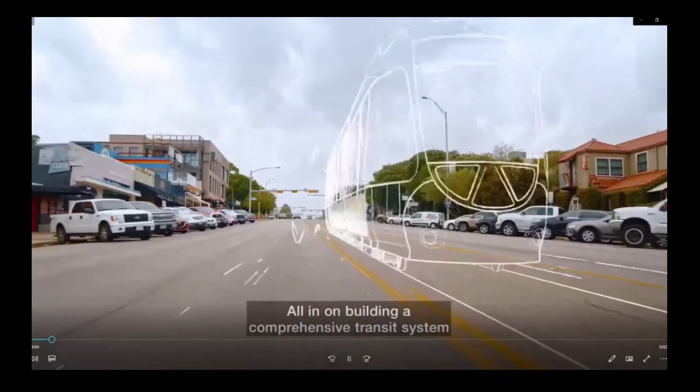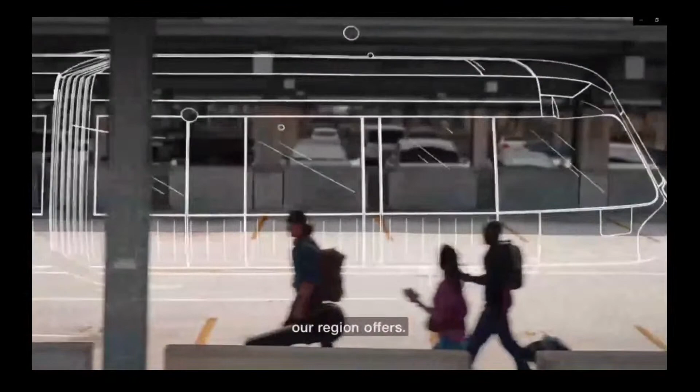Project Connect is all in on building a comprehensive transit system that will transform us into one of the most sustainable, equitable, and innovative metropolitan areas in the country. A place where we can all share in the many opportunities our region offers. All in on transforming us into a more connected region.

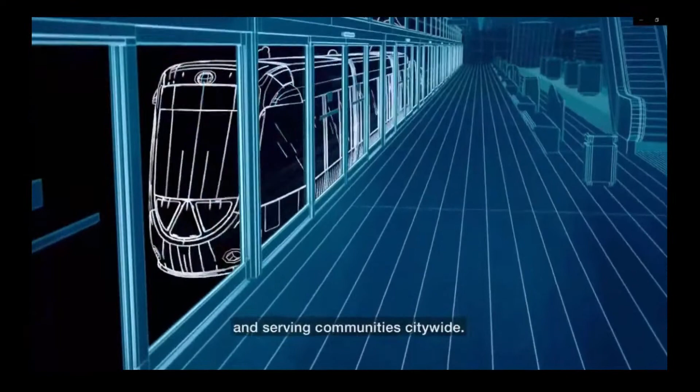With new rail lines stretching across our city, going under busy, bustling streets, and serving communities citywide. Plus, a more accessible bus system to more frequently connect neighborhoods than ever before. But Project Connect is more than just the vans, buses, and trains helping us get around easier. It's built upon our values: opportunity and equity, environment and sustainability, and innovation and technology.

A truly comprehensive transit system can connect people to opportunities. Project Connect will help create thousands of good local jobs and provide more access to healthcare, education, employment, essential services, entertainment, and will also create and maintain more affordable places to live. It's designed to help us all move toward a future without limits.

There's a shared passion in our community for the environment. That's why a commitment to the environment and sustainable practices are core to Project Connect. We envision a zero-emission fleet, and we will lean into the challenge to conserve and protect natural resources in the decisions we make. Technology and innovation inspire much of who we are as a region. Project Connect will embrace that spirit, making transportation smarter, more efficient, enjoyable, and easier to use.

This place belongs to every single one of us, those of us who live here now and those of us who will live here in the future. Project Connect was designed to let us all share in the many things our area has to offer: jobs, education, relationships, entertainment, family. We're all eager to connect on every level. Project Connect is all in for bringing us together in ways we hoped for, dreamed of, needed. Come see how you can be a part of it.

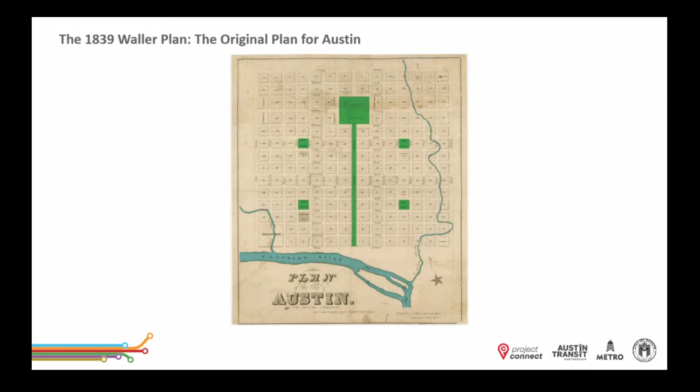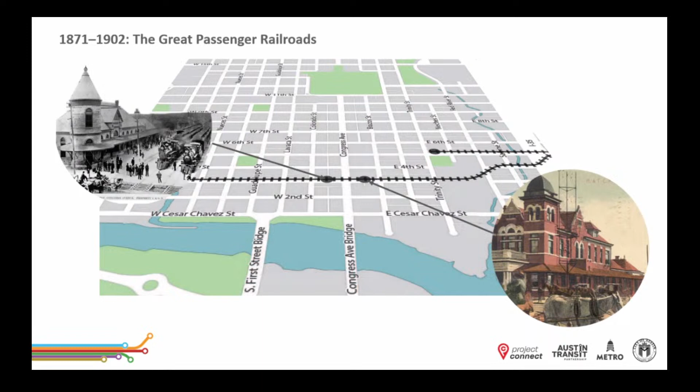One thing we also have to remember is that Austin has a robust history of transit. In fact, transit was an integral part of planning in the early 20th century in Austin. Did you know, for example, that there were 3 intercity passenger rail lines in Austin? They traveled along 3rd, 4th, and 5th streets. There were also 2 great stations located right on Congress Avenue, making it the preeminent transportation center of the region.

Streetcars were also part of Austin in the early 20th century. From 1891 to 1940, a system of 10 streetcar lines branched out to all parts of the growing city from its hub on Congress Avenue.

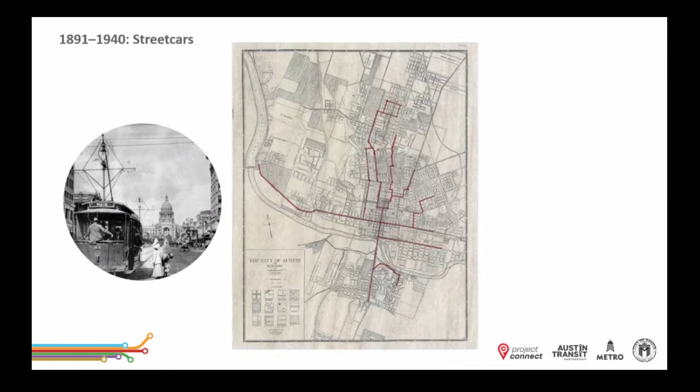We have the opportunity to build upon some of the positive planning decisions we've made in our history, but we must also acknowledge and learn from the mistakes of our past. In 1928, Austin developed a master plan that forcibly moved people of color to East Austin. The repercussions of that infamous plan are still very real. Public transportation has also played a role in perpetuating those inequities.

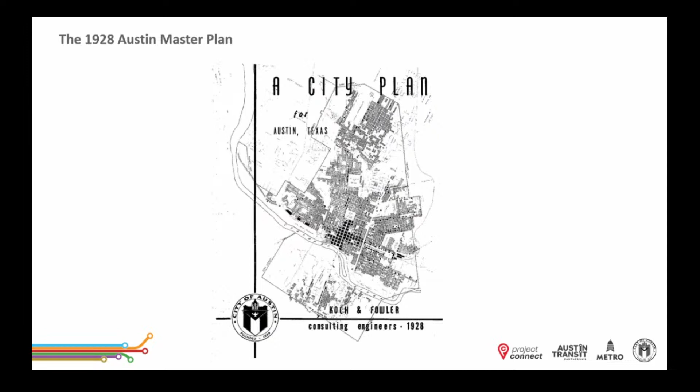But now we have a unique opportunity to leverage public transportation to make lasting change. Project Connect will be an inclusive and transformative program that will help address these long-standing inequities by connecting people to jobs, education, healthcare, and each other. As we work together to build a transit system that will serve all Austinites, we want to learn from the mistakes of the past and create a city that makes people feel welcomed, respected, and comfortable.

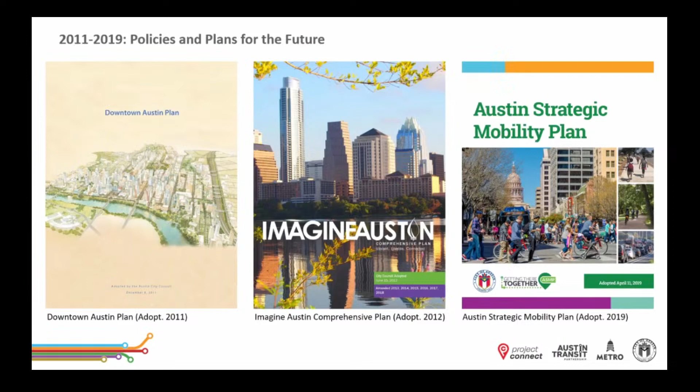Project Connect is a way for us to reimagine transit as inclusive and equitable. The program will add facilities that will be accessible by all. We imagine spaces that feel hospitable, welcoming, and inclusive, a city with a transit system that people can be proud of. And this is an opportunity to reimagine our public spaces.

The program will add transit facilities as well as space for drivers, bicyclists, and pedestrians. The program will also aim to protect existing trees and add more where possible.

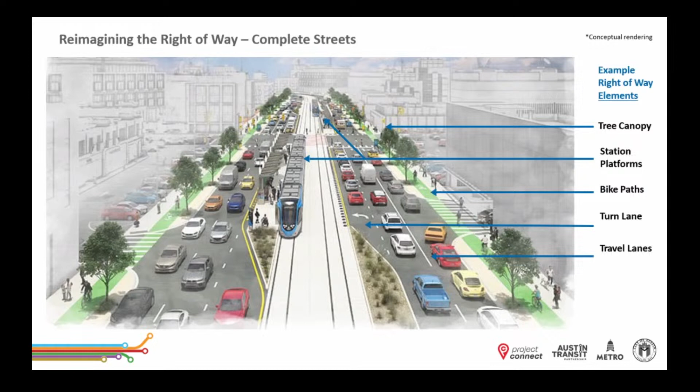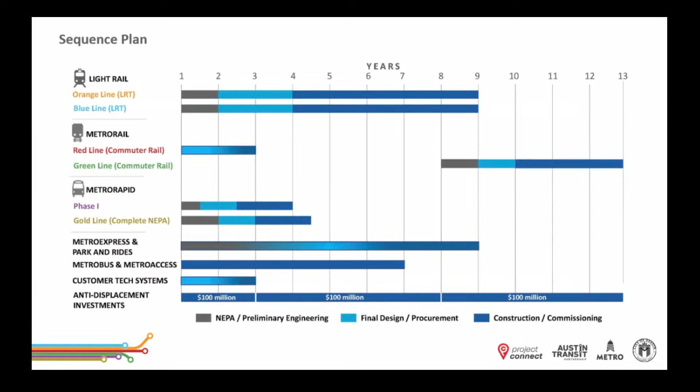Since Proposition A passed in November of 2020, we have reached multiple milestones for the program. There are just too many to name here, but here are some of the highlights.

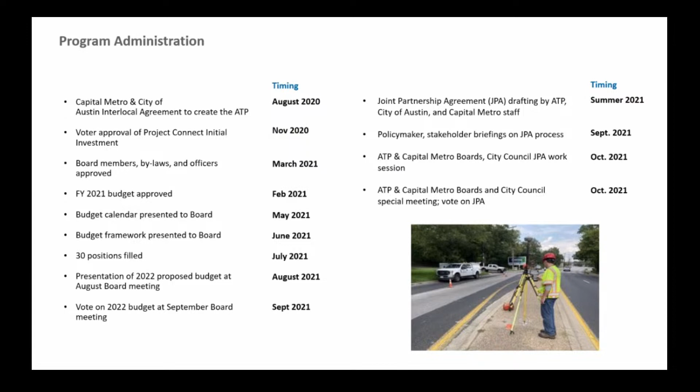We established the Austin Transit Partnership, or ATP, which is a partnership between CapMetro and the City of Austin to implement Project Connect. The team continues to work on planning the new McKalla station, including additional bus infrastructure. Work on the new Broadmoor station has also begun, and improvements are being made to increase capacity and frequency on the red line.

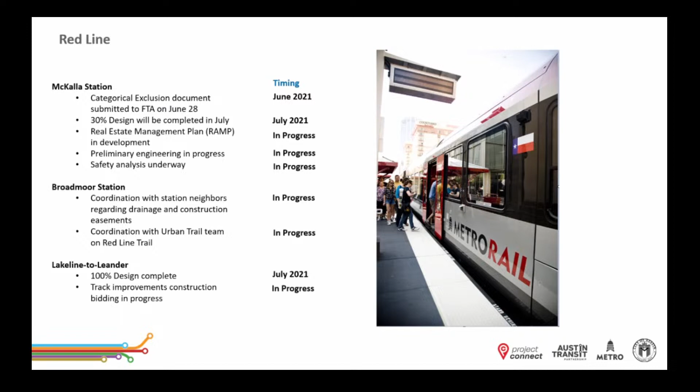Two new Metro Rapid lines, the Expo line and the Pleasant Valley line, were included in President Biden's fiscal year 2022 budget request to Congress. The request proposed a total of $36.1 million combined for the lines.

The team will be back in the community in the fall to get your feedback on the next two Metro Rapid lines to move forward, which are the Burnet to Menchaca and Oak Hill line and the Gold line.

The conceptual engineering, or 15% design, for the Orange and Blue lines is complete, and today we'll be showing you the design plans for both lines. We've met with the community as part of new working groups, and we've had two sets of public meetings to get your feedback on how the Orange and Blue lines can best fit into our community. We're excited to continue that dialogue with you today.

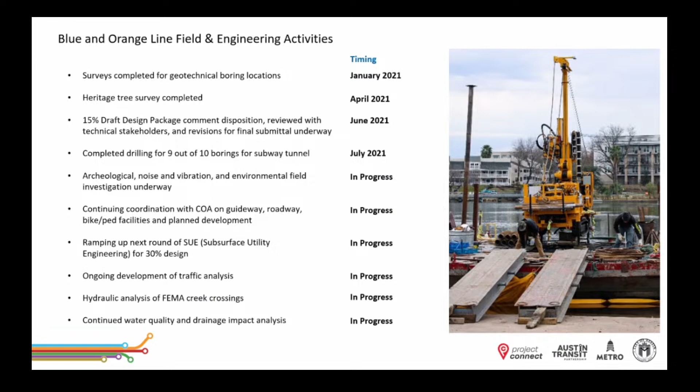Environmental work is also underway. We're continuing to add more pickup zones—that's our neighborhood circulator service. The latest to come online is the new Menchaca service, with the Oak Hill zone to follow later this month.

ATP continues to coordinate with the City of Austin on transit, roadway, and bicycle and pedestrian facilities for both lines. We're also coordinating closely with our other partner agencies.

Today, we're here to talk with you about a program that will help transform our city. The projects in this program do come with trade-offs, though. We'll be retrofitting our city to accommodate new transit opportunities in each section of the corridors, and that's no easy feat. We need your help.

Today's meeting will include breakout sessions to communicate about the project at the neighborhood level. We hope that you'll give us your input and let us know what you think. We're working together to do this right, and right isn't always easy. But remember, we're all in this together.

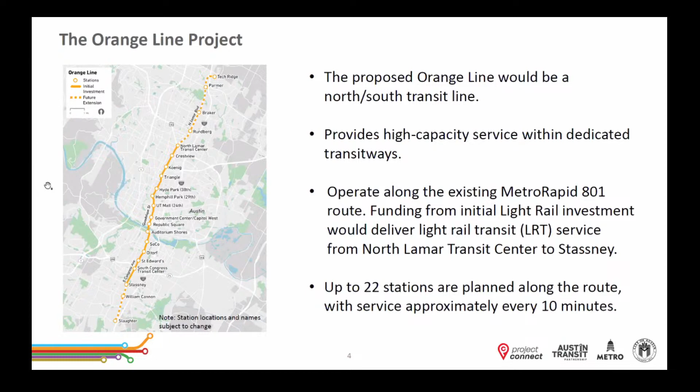Prior to this phase, the orange and blue line locally preferred alternatives were unanimously adopted by Capital Metro's Board of Directors and endorsed by the City Council on June 10th, 2020. In November 2020, City of Austin voters approved an 8.75-cent tax increase to help fund the next phase of implementation for the system plan, which includes both the orange and blue lines, allowing us to enter the phase we are in now, the environmental phase.

Earlier this year, we shared information with the community on the NEPA scoping process for both projects and explained what to expect over the next few years. We're now moving into the next phase of the environmental or NEPA process, which includes development of the draft environmental impact statement. After this phase is complete, we move into final design, then construction, and eventually testing and operation. An important aspect highlighted in this graphic is that public engagement will be conducted throughout this phase and future phases of the project.

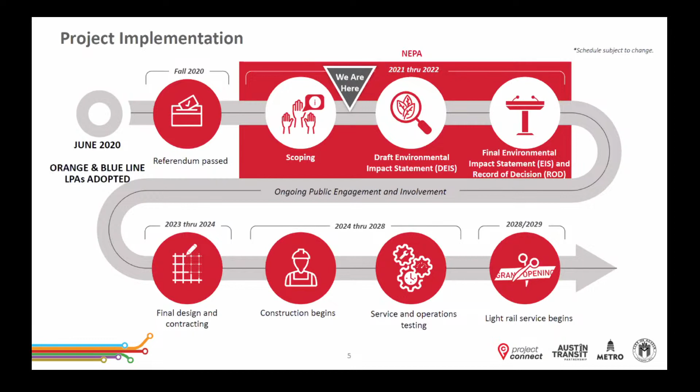For more information on the NEPA process, you can access materials developed for our scoping phase at projectconnect.com. Visit the Get Involved page and scroll to the bottom to look at previous virtual meetings.

There are 4 corridor design milestones that mark our progress on the project. At the same time as the environmental process is underway, the engineering team is working on preliminary design plans for the project. The environmental analysis and the preliminary engineering influence one another as we work towards a final environmental impact statement and the final 30% design plans.

So you can see, based on that graphic, we're in the top part, and we're in the earliest part at the top where it says 15% design. The 30% design will be complete sometime in the spring of 2022.

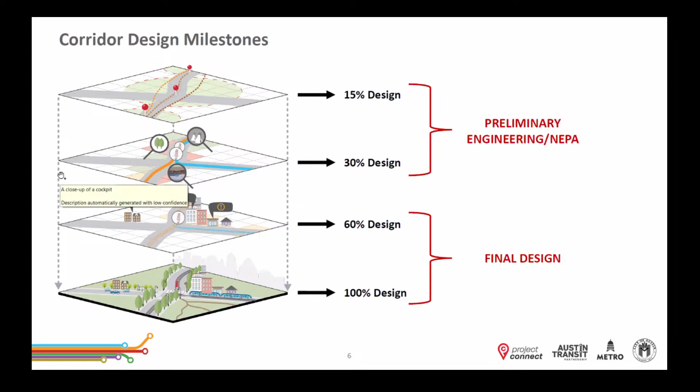A little bit more detail on the 15% design: it includes a lot of elements, initial engineering alignments, the estimated right-of-way, and identification of significant engineering and environmental challenges.

During today's presentation, we're going to share the light rail design elements and criteria that inform the project's design. We'll also discuss the constraints and considerations that have gone into determining options for solving these complex engineering challenges. These considerations, along with the community's input on project design, including station design and amenities, will be used to refine these engineering plans as we progress.

As part of the 15% design process, we'll also analyze traffic impacts and develop initial estimates for things like service frequency and ridership. More information on all of these items, as well as the analysis of potential environmental impacts and any mitigation strategies if necessary, will be shared with you in the months ahead.

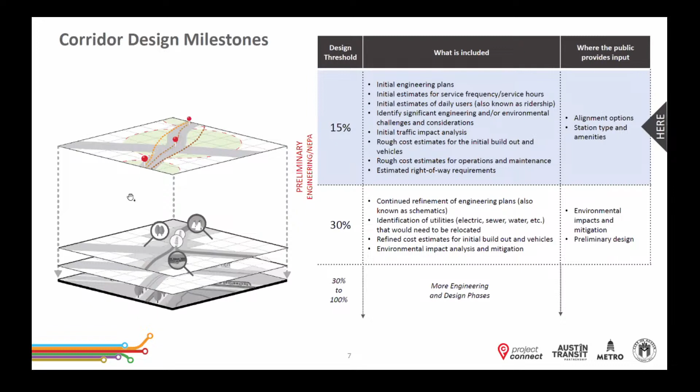To recap some of our recent engineering, environmental, and public engagement efforts: we've conducted right-of-way and utility surveys, coordinated with the City of Austin on planned roadway, bike, and pedestrian facilities and future development projects, and initiated archaeological, environmental, and historic resources field investigations.

We held 2 rounds of public meetings, including the scoping meetings I mentioned, held between January and March, and station alignment meetings held in April and May of this year.

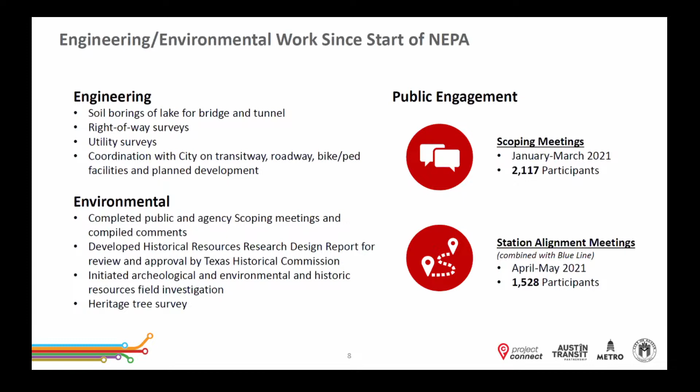This community input really helps us understand your concerns and desires as we continue to design the project. More details about the community engagement and input gathered so far are on the Project Connect website.

So with that, I'm going to pass it on to Kimmy, who's going to go into more detail about the light rail design elements that have informed our 15% design.

Thank you, Jerry. This image on the screen illustrates the common elements of a street right-of-way that incorporates a light rail transitway and station, with other elements such as travel lanes for cars, street trees, bike paths, and sidewalks. Because there is limited space for transportation in the existing right-of-way, we must reimagine the right-of-way and consider the trade-offs for prioritizing the use of the space, then determine if we need to acquire more space while minimizing the impacts.

When we say reimagine the right-of-way, what we mean is that we can work to include safe pedestrian facilities, trees, dedicated space for cyclists, prioritize connections to local bus routes, and identify opportunities for public art. It's important to note that everywhere the light rail system will travel throughout the city, we're also looking to see how we can improve the physical fabric of the city in a holistic way.

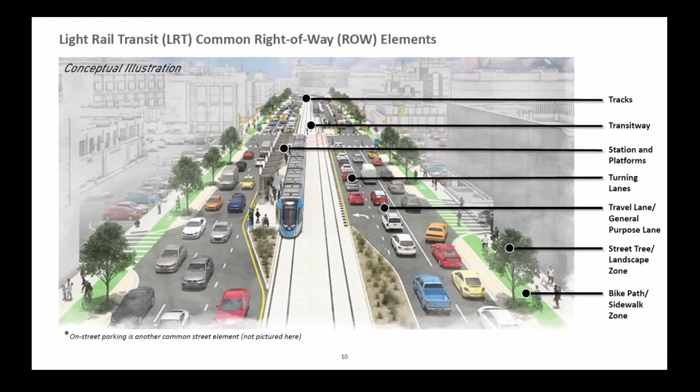We do take this holistic, human-centered design approach to the light rail system.

A number of criteria have influenced the design of a light rail system. This includes the technical requirements of light rail transit, such as the space needed for a transitway, which is typically 28 feet wide, as well as the space needed for station platforms and the turning radius of vehicles and more.

In addition, the Austin Strategic Mobility Plan, or ASMP, provides the criteria for accommodating Austin's multimodal transportation network, which includes bicycle and pedestrian facilities and travel lanes for cars and buses. Each of these facilities has a desired and a minimum width and placement within the right-of-way. Light rail has to meet specific design criteria.

Additionally, floodplains, utility conflicts, historical properties, parks and recreation space, and other aspects of the physical environment can guide the design. At this phase, the engineering team is assessing all of these factors to determine where and how the light rail lines could operate within the existing physical environment.

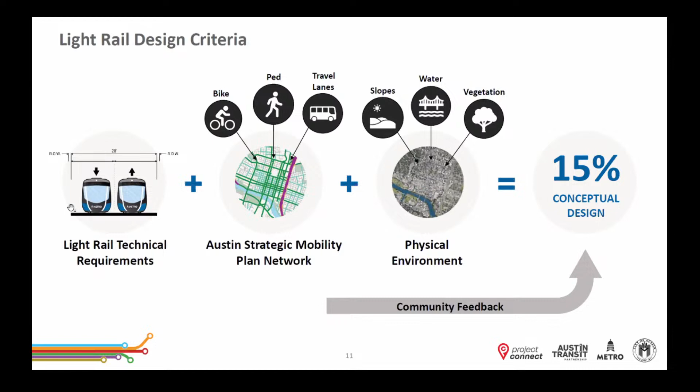Each of these factors, as well as community feedback on specific local issues and needs, goes into the development of the design plans. In these next few slides, we'll review the light rail technical requirements to demonstrate some of the constraints we are working within as we design the project. In addition, we'll talk about how light rail vehicles travel through intersections and the considerations that go into selecting station locations.

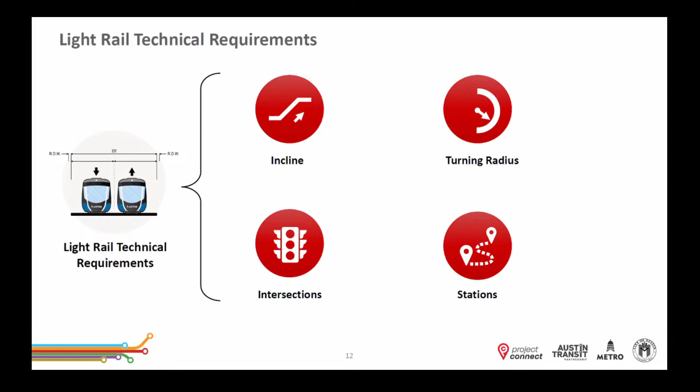So for light rail basics, this is the incline. The maximum grade that a transitway can navigate without costly engineering solutions is approximately a 6% slope. Similarly, stations should not be located on an incline, but instead should be on flat land in order to accommodate all users as they board and depart the train.

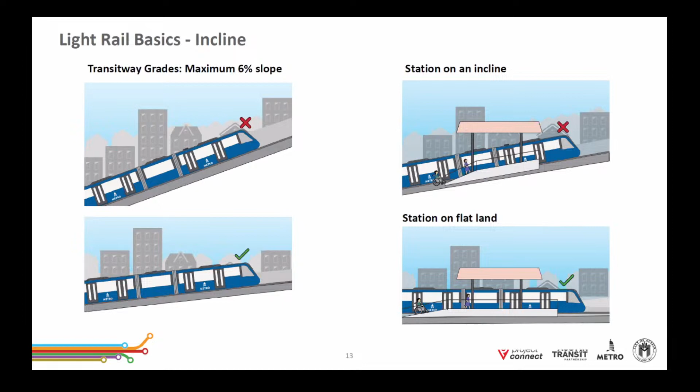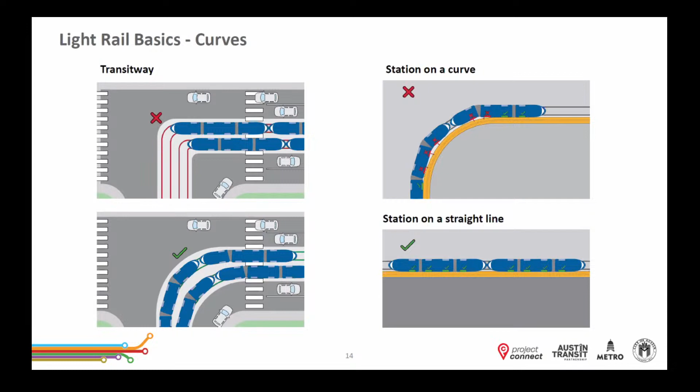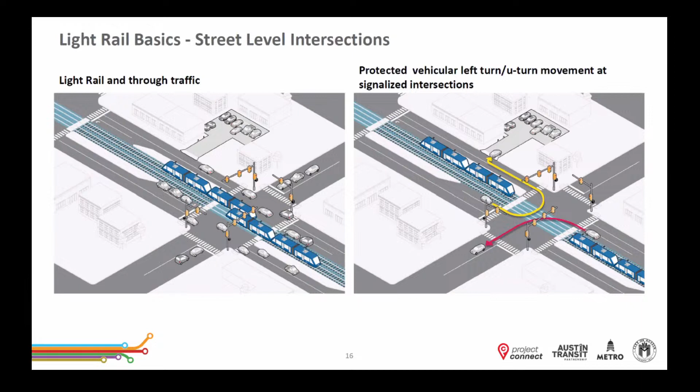Continuing on with intersections, this image on the right is the same one from the previous slide, which shows how a vehicle turns while the light rail vehicle is stopped at the intersection. During this time, vehicles that are turning and crossing the transitway will be able to do so. The left-hand image shows the light rail vehicles traveling straight through the intersection along with the vehicles that are traveling straight. Light rail vehicles will be given priority treatment at intersections to ensure travel times are faster and more reliable.

They should balance speed and access with stop spacing, meaning that when we zoom out from the station to see the radius of the area that a passenger could reasonably access on foot or on a bike, we are looking for a balance in that coverage. Our goal is to minimize overlap in lower density areas, while at the same time minimizing gaps in coverage. In higher density areas, we may want more overlap between coverage areas to serve the most users conveniently.

And finally, we want to serve high population and high activity areas, meaning stations would ideally be located close enough to the places people want to go. So once they arrive at the station, they can walk or bike to their final destination with relative ease.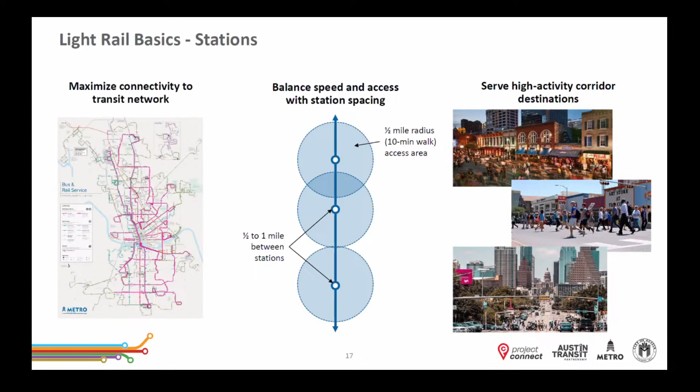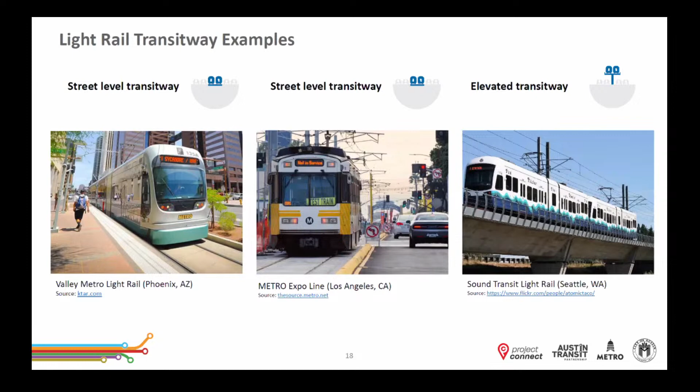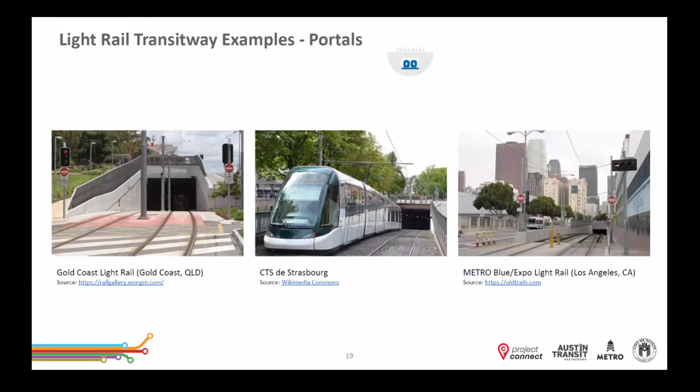On this slide, we are showing images of how a transitway might look as it goes into or comes out of an underground tunnel or subway, and these structures are referred to as portals.

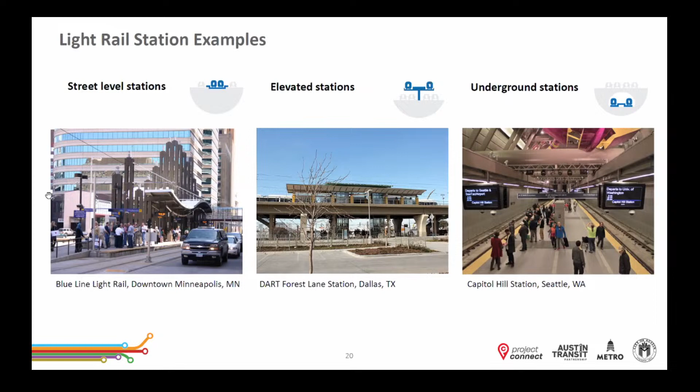Now that we've covered the basics of the engineering process and requirements, we'll talk about the Orange Line specifically and how we've applied those basics to the project's 15% design.

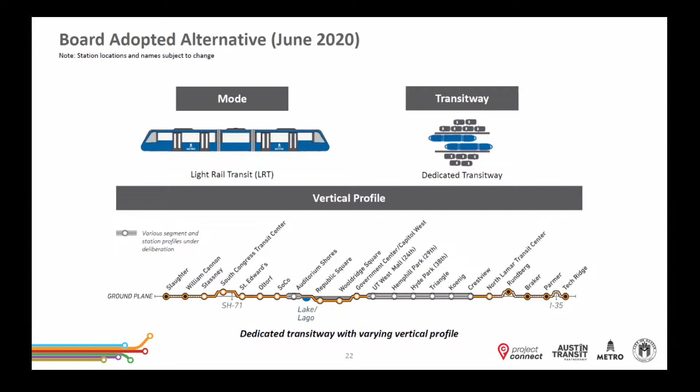Since then, we've had some changes, so we wanted to update you on some of the more significant design advances that have been made since the adoption of the LPA, to provide a better overall picture of what the Orange Line design looks like today.

For an overview, working from the south through Oltorf, the vertical profile being shown today is the same as shown previously. We still have multiple configuration options for both the transitway and station at SoCo, but we're also proposing a subway from Auditorium Shores to Government Center and Capitol West, meaning the project would tunnel under Lady Bird Lake. This tunnel was formerly shown ending north of Lady Bird Lake. There are still some options under consideration for the exact location of the tunnel's end, or north and south portal.

We are proposing a street level transitway between UT West Mall and Crestview Station. We are now proposing an elevated station at Crestview and an elevated transitway crossing I-35 between Parmer and Tech Ridge. These are both elevated primarily to avoid conflicts with other transportation facilities.

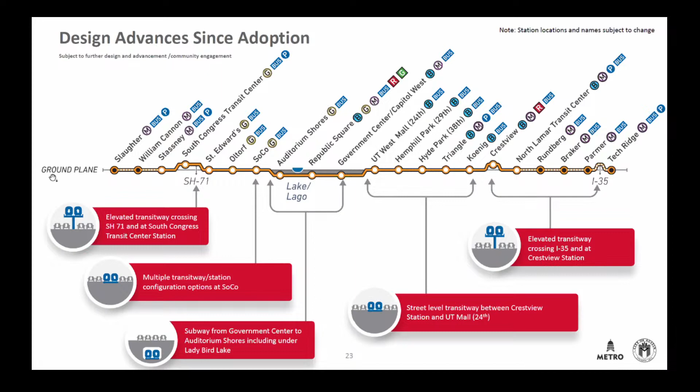Over the next group of slides, we will walk through a series of aerial views from the north half of the Orange Line project, calling out specific aspects of the project we want to bring to your attention. After that, we will break out into working group sessions where we'll walk through the actual engineering plans and pause as needed to explain specific aspects and answer any questions.

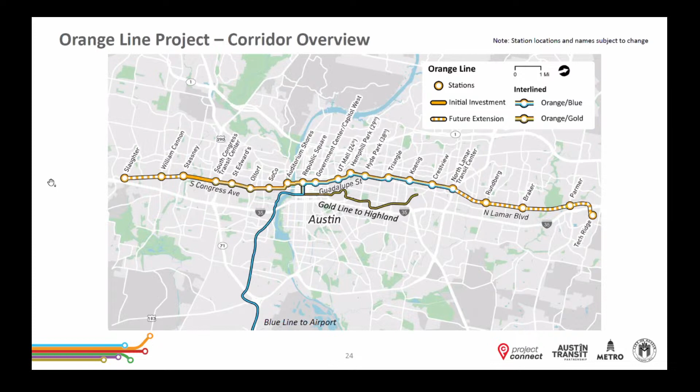The Republic Square station will be underground in the vicinity of 4th Street. This is also where the orange and blue lines will connect. The Government Center, Capitol West Station will also be underground.

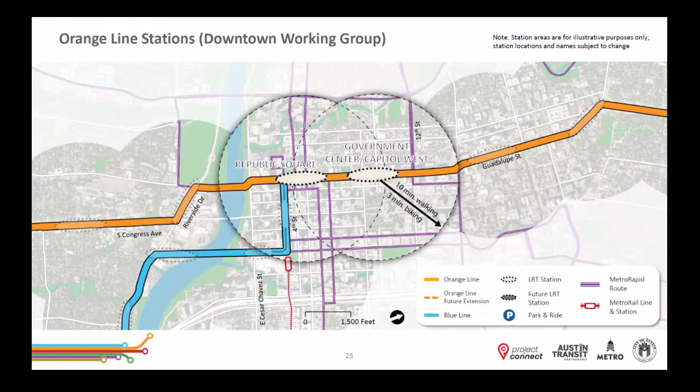Before we get started, let's do a quick orientation to the layout of the next group of slides. In the top left, you'll see the station or area we are focusing on. In the top right, you'll see a list of numbers and notes.

When you look at the center aerial image, you'll see there are also numbers. The number on the image matches to a corresponding note on the right side of the page. Additionally, on most of the aerial images, you'll see green arrows at each of the station platforms.

These green arrows indicate how pedestrians would access the station platform. Below the notes, you'll see a cross-section diagram. This corresponds to the matching letter on the aerial image. This is an engineering concept used to show what the right-of-way would look like if you crossed it at a particular location. For these cross sections, orange indicates light rail tracks and stations.

Green indicates the pedestrian and bicycle facilities, generally with the tree and furniture zone between them. Gray indicates the general purpose lanes, or lanes used for cars, buses, or truck through and turning traffic. Finally, across the bottom of the slide, you can see the full Orange Line project to better illustrate what area of the project we are looking at.

Now, to discuss this slide specifically: we anticipate providing roadway improvements in the area north of 3rd Street and north of 6th Street, even though the transitway is underground in this area. This is because we are currently proposing a cut and cover tunnel rather than a bored tunnel for construction only. So the roadway would be rebuilt as part of construction.

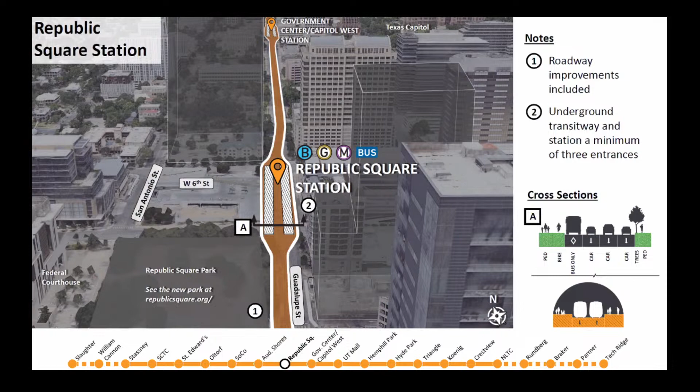We are currently proposing a minimum of 3 pedestrian entrances, including a signature entrance just to the north of 4th Street on the west side of Guadalupe. There are 3 options for the Government Center station location that are still being evaluated. These options will be discussed in the Downtown Working Group breakout session following this presentation.

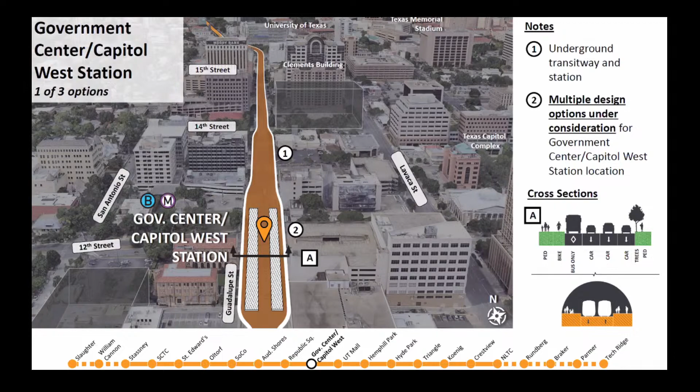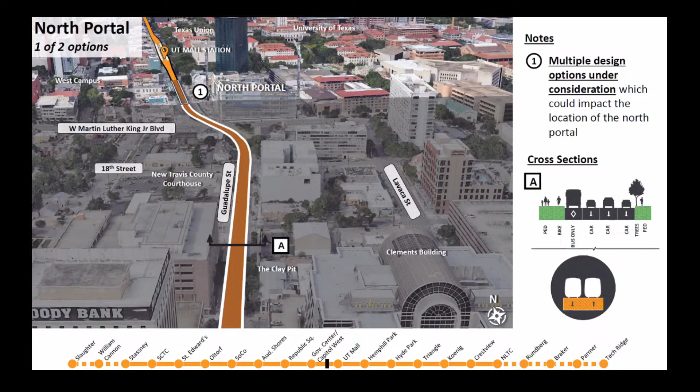The North Portal is where light rail vehicles headed south will enter the subway and vehicles headed north will exit the subway. The option shown proposes the North Portal located north of MLK Boulevard. An additional option would place the North Portal south of MLK Boulevard, between 16th and 18th Streets. These options will also be discussed in the Downtown Working Group breakout session following this presentation.

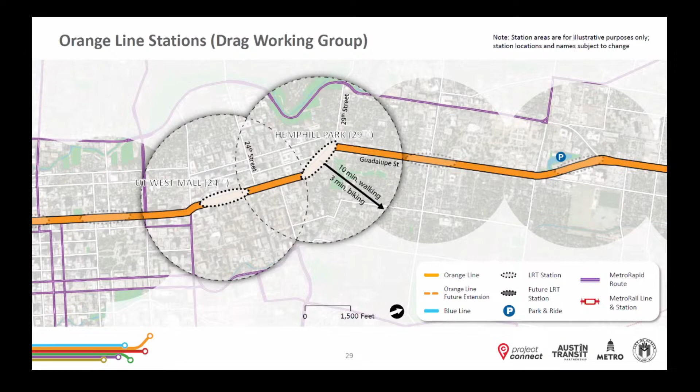The UT West Mall 24th Street station has the highest pedestrian activity in the corridor, and the platforms will be located in proximity to the West Campus entrance on the drag. Hemphill Park, another high pedestrian activity station, would likely be between 27th and 29th Streets.

Reconfiguring the existing Nueces, North Guadalupe, and 29th Streets is critical to improving mobility throughout the West Campus area. There are 3 operational configuration options in the drag area, but all of the options have the UT West Mall station as a center platform in the same general area shown in this image.

Pedestrian access would be provided on both sides of the platform, though you can only see one side in this view. It's important to note that all options also include some reduction of vehicle travel lanes through the drag area. These options will be discussed in the drag working group breakout session following this presentation.

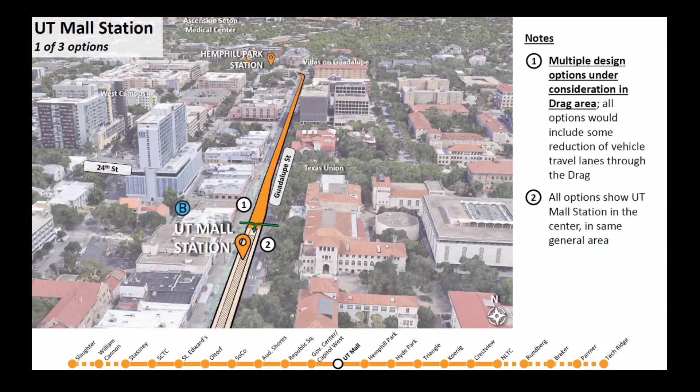The operational configuration options in the drag area extend through the Hemphill Park station area shown on this slide. Due to the anticipated vehicle traffic lane reductions on Guadalupe, a new connection from Dean Keaton to San Antonio is required. This image shows the proposed center-aligned Hemphill Park station. Additionally, we are proposing to reconfigure the 29th and Guadalupe intersection to improve safety and access.

Nueces is one-way today, but the City of Austin plans to change the operation of this street to two-way. The reconfiguration of this intersection, in conjunction with the Orange Line Guideway, will work better for two-way traffic on Nueces, as well as providing a much safer crossing than the current intersection.

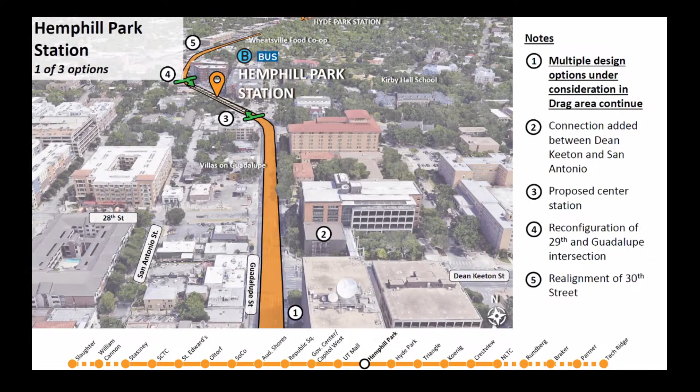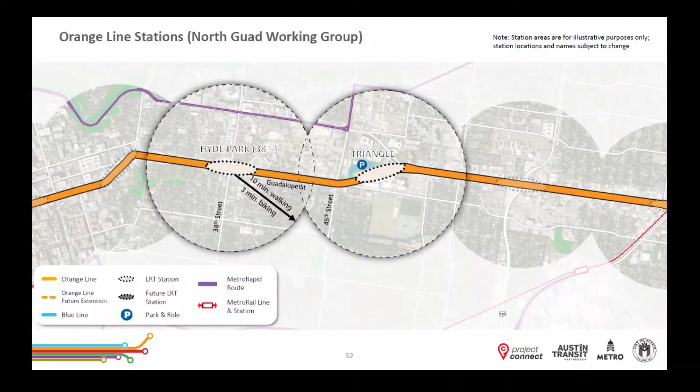We recognize the importance of maintaining the community character in this area. At the same time, the right-of-way in this area is very constrained. We are coordinating with Austin State Hospital leadership to leverage some of their property. Austin State Hospital has historical significance, and we are working with the Texas Historical Commission to maintain those elements. We also recognize that several of the businesses on the east side are also historic structures.

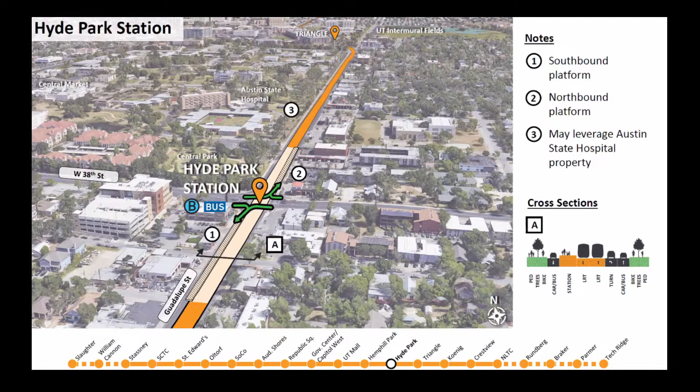A center platform in the heart of the Triangle area is proposed. We provide one lane of through traffic throughout this area, and the inside lane will be for left turns at signalized intersections. As the guideway transitions to North Lamar, two vehicular lanes will be maintained adjacent to the newly developed state-owned facilities.

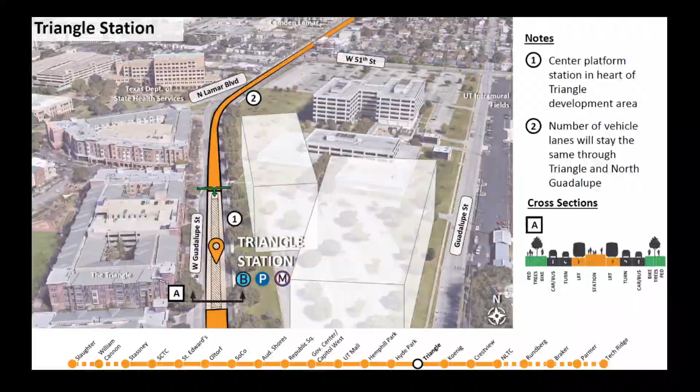The Koenig station would be located in the vicinity of the Koenig intersection. The Crestview area will connect multiple types of transit. The North Lamar Transit Center exists today but would be expanded as part of this project. This is the northern end of the initial project investment.

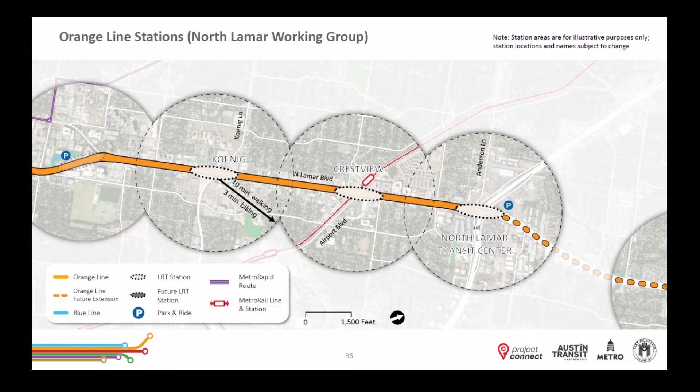The existing right-of-way is extremely constrained in this area, including the entire length of North Lamar from the Triangle to Airport Boulevard, which is north of this image. Because of this, we are showing full bicycle and pedestrian facilities in this area, but the tree furniture zone varies based on the right-of-way constraints and minimizing impacts to structures.

The tracks are at grade and running in the center in this area. The center platform, Koenig Station, is located south of the intersection.

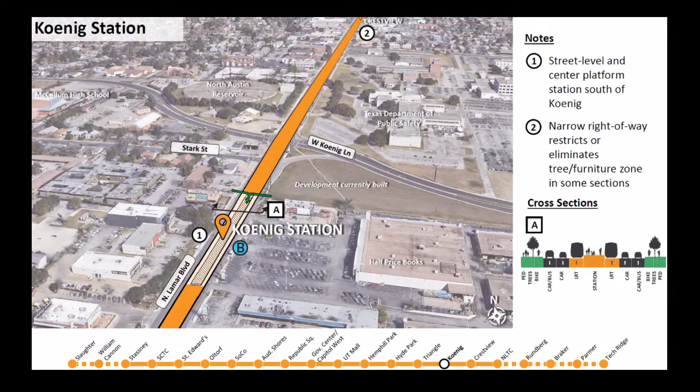The Crestview area will be a very special place as it will connect the Orange Line, Red Line, local bus routes, and improved bicycle and pedestrian facilities. As such, there is significant opportunity to improve North Lamar and Airport Boulevard traffic flow, as well as create a signature station that creates a more walkable area.

The current proposal is to depress the Red Line beneath North Lamar. The Freight Line, which only operates late at night, will remain at grade. The Orange Line will be elevated above the Freight Line, and the Crestview station will be elevated.

There may be opportunities for transit-oriented development in this area, and redeveloping the area for connectivity will be key as we progress the design. It's important to note here that this design is very preliminary, and we are still exploring design options in this area.

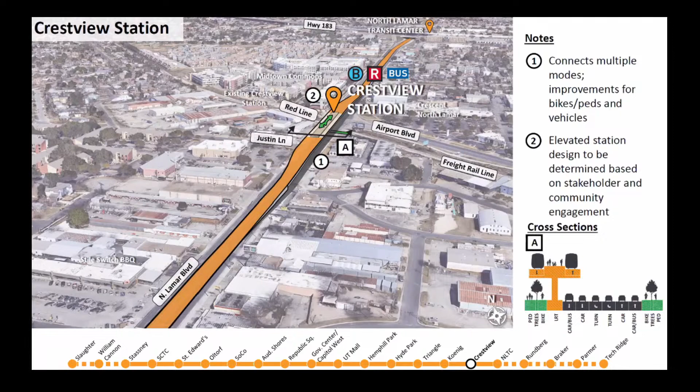The tracks would be located in the center of the main travel lanes of Lamar through the 183 intersection. The North Lamar Transit Center, or NLTC, will serve as the initial terminus for the project and will take advantage of the existing NLTC park and ride.

The station will be located in the middle of North Lamar. A new pedestrian bridge will connect the station to both NLTC and the community to the east. Several designs for the pedestrian bridge are under consideration, and we'll be prepared to discuss these designs next year.

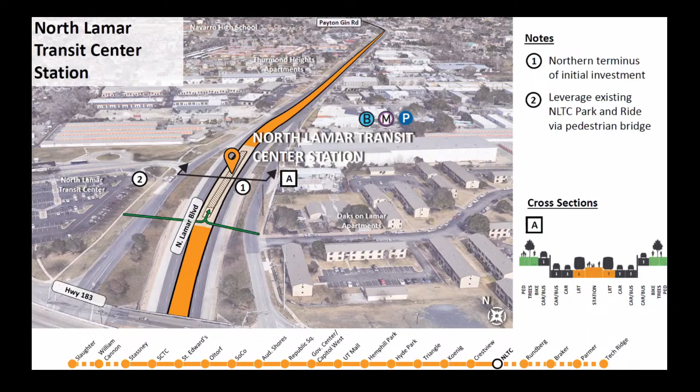As density decreases, the distance between stations increases. Since this part of the corridor will be implemented in the future, in the interim, these areas will continue to be served by the 801 Metro Rapid, where they will tie into the North Lamar Transit Center. The Tech Ridge Park and Ride will also be connected to I-35.

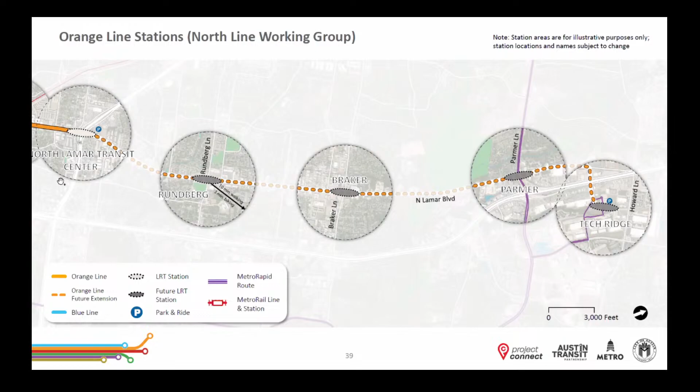In this area, we are proposing to add some signalized intersections. Additional signalized intersections would also increase bike-ped connectivity. The Rundberg station is shown as a split platform station.

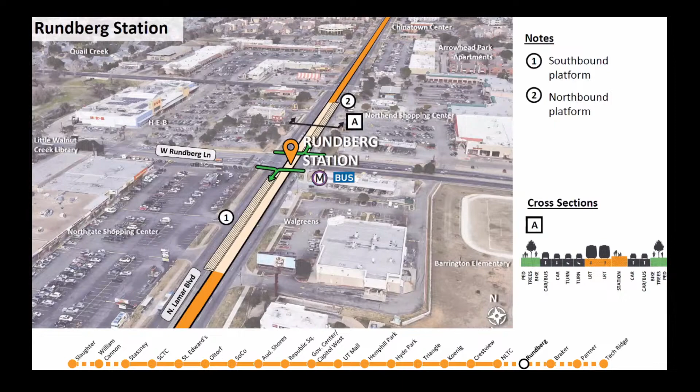In this area, the transitway is located in the center of the existing roadway, and we anticipate providing full bicycle and pedestrian facilities with a full tree furniture zone. While the right-of-way in these areas is relatively wide, slivers of right-of-way will be needed in the areas where there are left turn lanes.

The Braker station is in the vicinity of Chinatown and is currently shown as a split platform to the north and south of the Braker intersection.

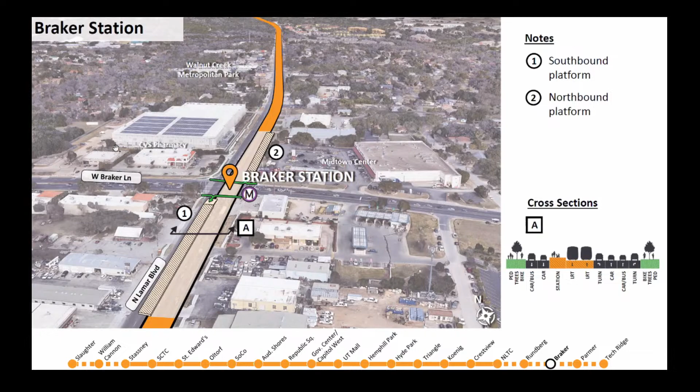In the area of the proposed Parmer station, the tracks would be at street level. The Parmer station is proposed as a split platform to the north and south of Parmer Lane. Full and separate bicycle and pedestrian facilities are shown in this area as well.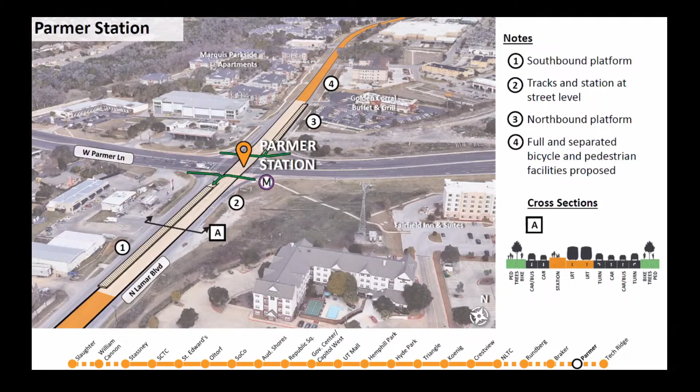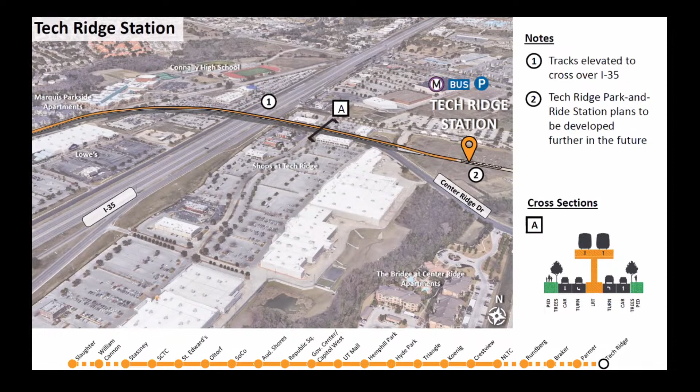It's important to note here that this design is very preliminary and we are still exploring design options in this area. With that, I'll turn it over to Abby to wrap up.

In addition to the details we just shared about the concept design, we wanted to provide a brief review of the environmental process that's currently underway. We talked a lot about this during the scoping round of public meetings in January, and you can see those materials at projectconnect.com. An important part of this phase is to identify and evaluate the potential effects the project may have on the physical, natural, human, and cultural environments.

During this process, we gather information about places and resources, both from the community and through various methods of data collection. We then analyze the environmental, social, and economic impacts of the project and share those findings with the community for feedback. This helps us understand your concerns and identify mitigation strategies so we can better inform the decision-making process.

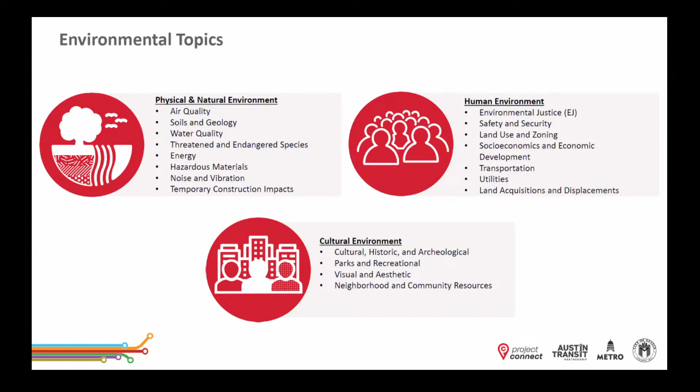In winter of 2022, we anticipate the completion of the final environmental impact statement, as well as receipt of a record of decision from the FTA.

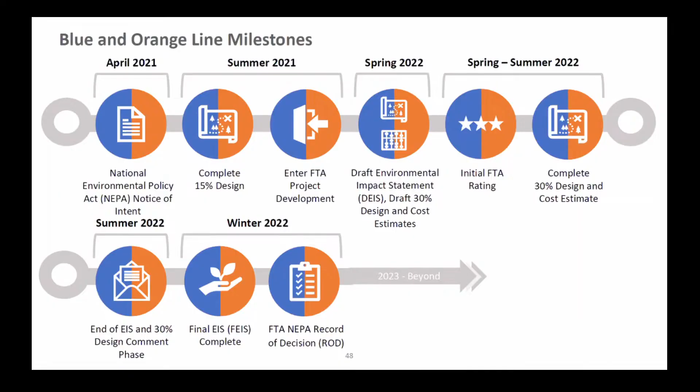All of the information we shared today and the feedback questions we'll discuss in the breakout rooms are available online at projectconnect.com. Please share the word with your friends, neighbors, and colleagues so they can visit the website to review materials and provide feedback.